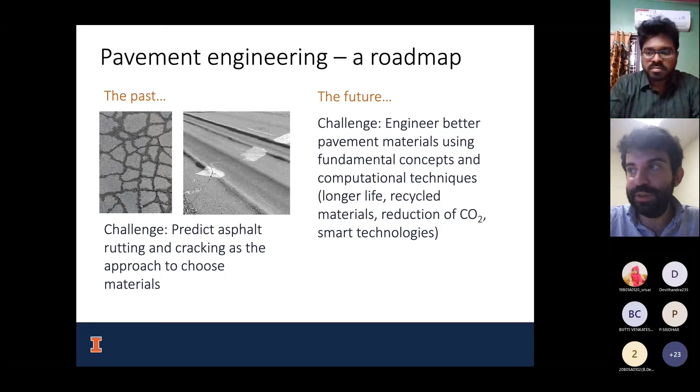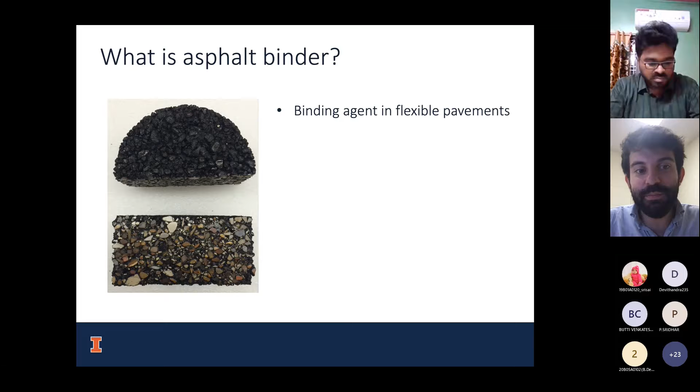So first, I want to start off talking about what asphalt binder is, because asphalt binder is the part we're trying to replace. Asphalt binder is the binding agent, it's the glue that holds aggregates together. We are also trying to replace aggregates, but not quite as much as the binder. It's obtained from fractional distillation of crude oil, so this basically means it's coming from the oil and gas industry, but it can also occur naturally—that's a very small amount. Almost all of it comes from the oil and gas industry, so you can see why we are, of course, trying to replace it quickly.

It's got a complex hydrocarbon structure. This is related to the fact that it's coming from the petroleum industry. It's made up of hydrocarbons, essentially the heavier fractions, higher molecular weight, the leftover stuff that cannot be used as fuel for vehicles and whatnot. It's used as asphalt, but it's not free and it's not a waste material. It's something we get from the petroleum industry, but it's still expensive and takes some difficulty to use. It's a thermoviscoelastic material, which most of you at the undergrad level are probably not too familiar with.

Basically this means it's very sensitive not only to temperature, but also to the loading rate at which the material is applied. So it's very sensitive to the rate at which we load the specimen, meaning the traffic speed in our case, because we're talking about pavements.

All sources, even different batches from the same source, have different properties. You will see the properties look a little different from each source. Sometimes even the same producer will hand you asphalt binder just a few weeks apart, and you'll see big differences. So we try to think of this material as always being very dynamic. We don't know exactly what we're getting at any time, but it's important to characterize it because it's generally thought to control mixture cracking.

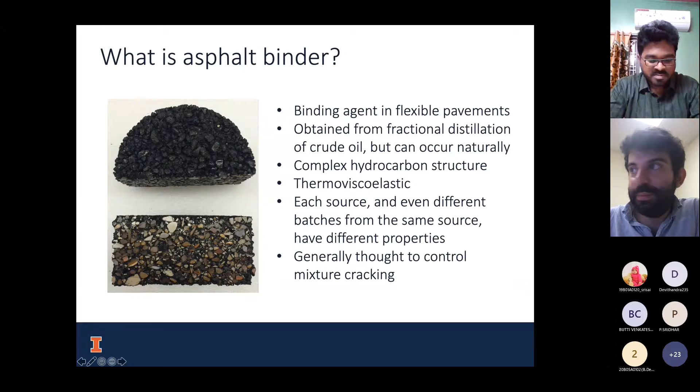For a long time, we studied just the regular binder, the asphalt binder coming from petroleum sources. But as mentioned, there are some new challenges now, and one of the biggest challenges is that we aren't going to have asphalt binder the way we did.

On top of that, there is a lot of push to be more sustainable, to reduce our carbon footprint. So we need to use asphalt in a strategic way, using recycled materials, rejuvenating the materials we have, and then replacing asphalt. I want to focus this presentation a bit on what's relevant for those watching at home, so they can understand what might help improve infrastructure in India, but also infrastructure around the world, to make our use of this material a bit more sustainable.

So first I want to talk about recycled asphalt. Reclaimed or recycled asphalt pavement — in the US, we reclaim 90 million tons of asphalt a year, and 80% of that is recycled, meaning this is the most recycled material in America. A lot of people don't think about this material specifically; they think about recycling metals and plastics at home. But actually, this is the most recycled material on Earth. We save $30 to $80 a ton when we recycle. But more importantly, this practice should be green and sustainable.

Now, recycling today is not as relevant in India because many of the asphalt pavements are newer. India was previously using a lot of concrete for paving roads and now has many more miles paved with asphalt. So a lot of this recycling isn't as relevant yet, because there aren't many pavements reaching the end of their service life right now in India. But it will quickly become relevant as more pavements reach end of life and you need to decide what to do with those materials. If you send them to the landfill, you're wasting the potential of recycled materials and creating waste. So instead, we try to recycle as much asphalt as we can for the pavement.

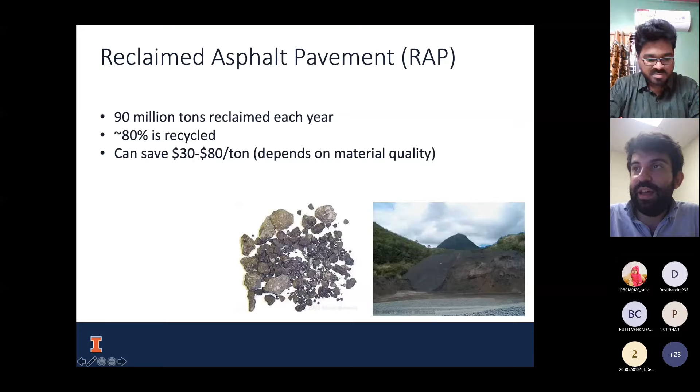And for municipal solid waste in 2017, all of it together was 67 million tons. So again, asphalt is more than all of the municipal, meaning the things from houses and regular businesses. Asphalt is more than all of that we're recycling, right? So we're recycling such a huge amount.

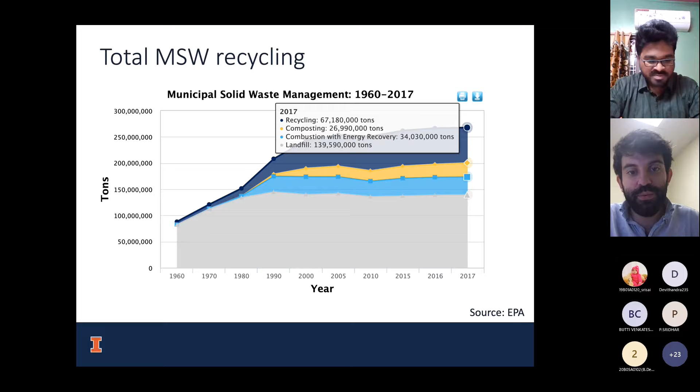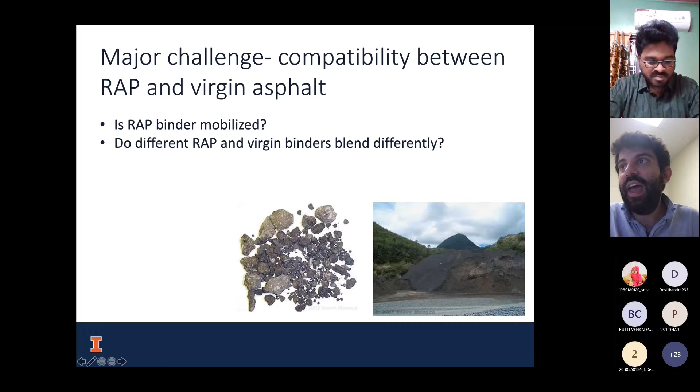This is the challenge, right? We want to use this material as a replacement for the asphalt we're already using. But the major challenge is: is this material compatible with the virgin asphalt? So is the RAP binder in the asphalt mobilized? And do the different RAP and virgin binders blend differently, right?

The RAP binder is heavily oxidized. It's more stiff, and it has difficulty mobilizing because this material is aged, right? So that means it had some reaction with the oxygen, and now it's finding a lot of difficulty getting it

to move again at normal mixing temperatures. And the big challenge here from a sustainability perspective - I think I talked about this last time, but I want to now emphasize the sustainability perspective, right? The big challenge from a sustainability perspective with this mixing is if we have to raise the temperature to mix it, that increases CO2 emissions and it increases hazards to human health, right?

Those are the two things we cannot have. When we use RAP, maybe we reduce the CO2 emissions because we need to produce less binder, but then we're increasing them again when we use it because we're raising the mixing temperature, right? This is a big challenge. This is something we cannot do.

So we don't want to elevate the temperature. We want to keep the temperature reduced. And so maybe not all RAP binders can be used the same way. So we have to consider which ones to use.

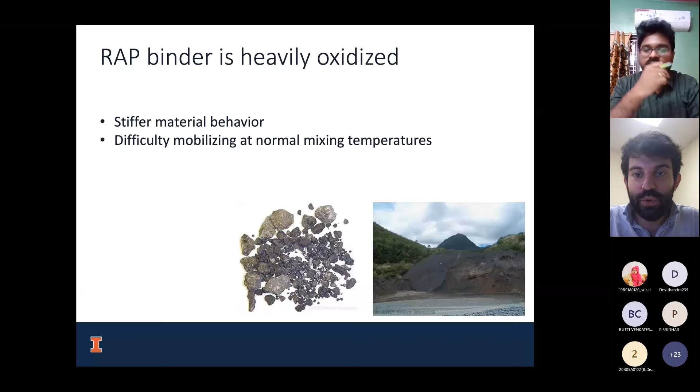And again, I think I showed this last time, but we came up with a simple titration-based procedure. We want to indicate if this material is suitable for recycling. So we have a titration-based procedure where we check the dispersive forces present using titration of a solvent. We just add drop by drop of solvent to a sample of binder, and we measure how much dispersive force is present. So if the binder is too stiff and brittle to be mobilized, we get a good sense of that and we can know to avoid that RAP or to use it in a different application.

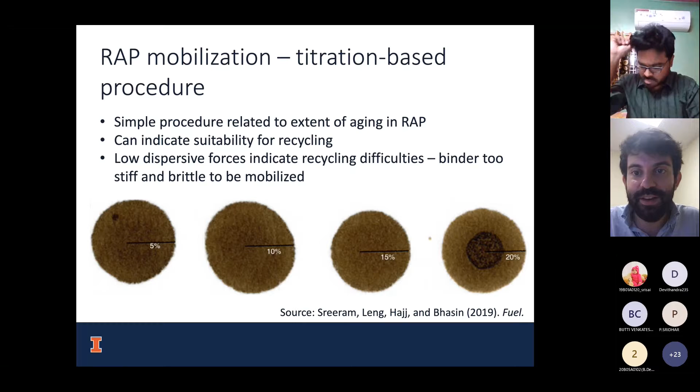You can see just some different binders, some different virgin asphalt binder compared with RAP. So we have some baseline, and then some RAPs are almost exactly the same, so they haven't been aged at all, and some are very different.

So again, I wanted to present this work because I feel this is so crucial as it comes now as a challenge in many countries using RAP for the first time, right? Not to make the same mistakes that we have in the United States where we just said all RAP is treated equally. Instead, we want to make sure we're screening the RAP properly and understanding how we can use this material for the first time.

And I think when you guys go into industry, many of the students here will find there's always a challenge like saving money, right? So the contractor needs to save money. They want to do the most efficient thing. They want to use the most RAP possible because it's free. It's a waste material. But what you will find is that you need to check carefully if this RAP can be used and if it's going to lead to premature distress.

Because a lot of times when the construction is over, the contractor is not responsible anymore. Then it becomes the agency's problem. So if you are working for the highway agency, you want to make sure that you're stressing that you need to check if that RAP is good. And this is something we're still not doing in the United States today. So we're still a little bit concerned about whether all RAP is equal, right?

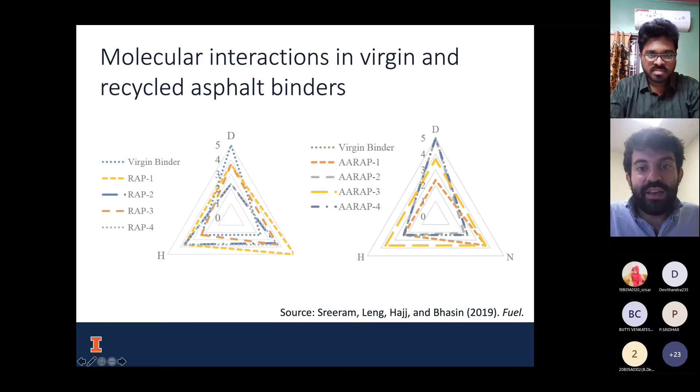Next thing, we want to check the interaction between the base binder and two different RAP samples. This was also done in this study, where we checked the dispersive forces present in mixes of RAP and base binder. That's another way to identify which RAP is more prone to recycling and better blends with specific virgin binders.

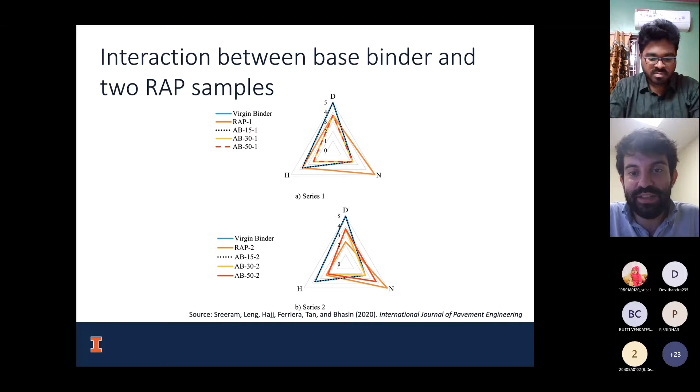So compatibility is important. I suggest definitely keeping compatibility in mind as you explore this material.

Now let's talk about rejuvenation. If you have RAP that's incompatible, you still need to use it, right? This is the most critical thing. Maybe you'll have RAP that you simply don't know how to use, but you cannot landfill it, so maybe we can rejuvenate.

I want to talk very briefly about some of the types of rejuvenators. A lot of the current best ones on the market are proprietary, meaning they have some commercial formulation. Some company has created them and decided this will be the best softening material to bring the stiffness down and reuse in construction at a reasonable temperature, to avoid CO2 emissions and make it more sustainable.

But from the biomaterials perspective, this presents a really nice option. I think this is becoming quite popular in many parts of the world because these proprietary ones are quite expensive, but biomaterials can be obtained cheaply or even for free coming from nature, such as waste from animals, waste from plants, or various oils.

There's also high maltene oils that come from the petroleum industry, a process similar to asphalt. And there's recycled oils, such as waste cooking oil. We published one paper recently on using waste cooking oil. Some people also use waste engine oil, the kind of lubricant present in engines, as a softening material.

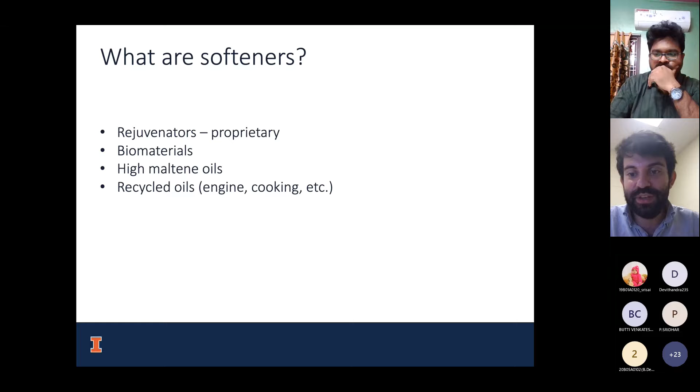Now, one thing you have to be careful of, of course, is that it doesn't compromise performance. So anything we use here, make sure it doesn't compromise performance before you do it.

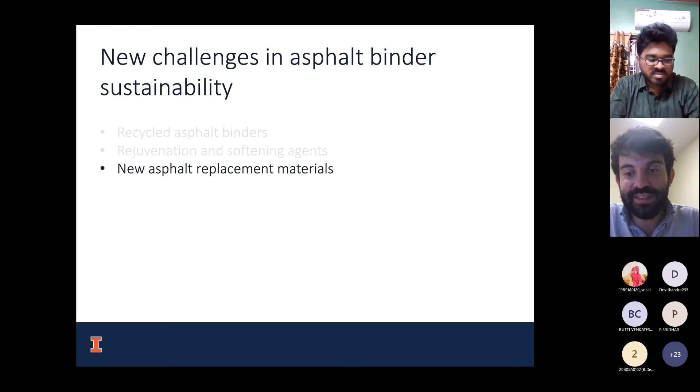Finally, I want to talk about asphalt replacement, which is kind of what I was going for. We talked about using recycled asphalt, which is one critical way, probably the most critical way on the horizon, because we already know this material worked once, so we can recycle it easily. But now we want to know, how can we replace asphalt with other materials?

The first one that I think is most critical - and I'm unique in thinking this is most critical, most people kind of overlooked it - is sulfur, because it's so widely available and we know the performance is good. In this paper, we looked at sulfur as a replacement for the asphalt binder in the mix, and also for the asphalt aggregate.

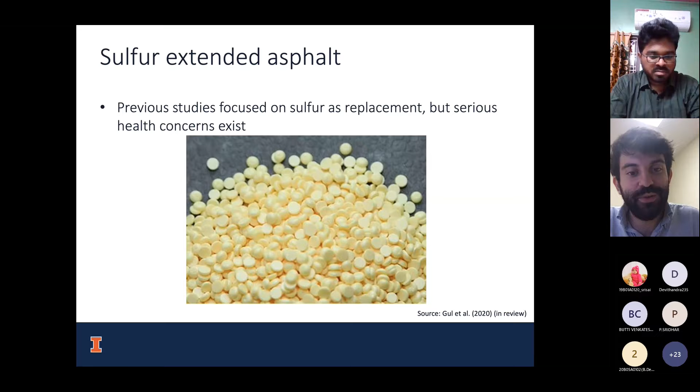You can add it by what they call the wet method or dry method - where you blend the binder with sulfur first, or you just blend the whole mix with sulfur, more like an aggregate. We use these elemental sulfur pellets, but the problem with sulfur is that human health hazards exist from it. This material emits a lot of toxic fumes, and again, we always have to think of health.

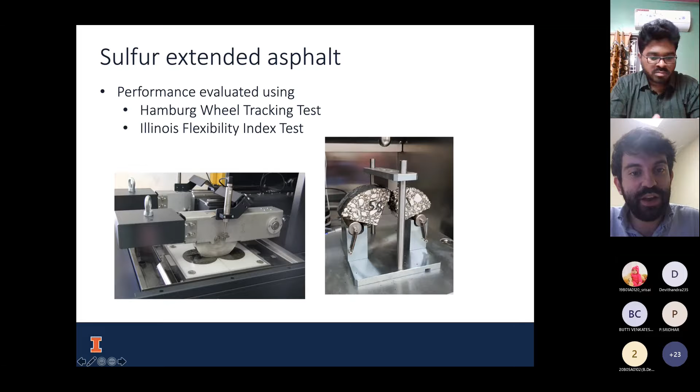We ran some tests, for rutting - the deformation of the pavement, that's the Hamburg wheel tracking test - and cracking tests in the IFIT, Illinois Flexibility Index test. We found that rutting is generally improved when we add sulfur. Cracking is a little more mixed, but at 30% sulfur it didn't compromise it too badly, so we consider that a possibility. What I like about this study is it shows the feasibility that yes, we can replace asphalt with something in big percentages.

Besides recycled asphalt, nothing else right now we're using more than 10%. But with sulfur, we can go up to 30%, for example, and make it work.

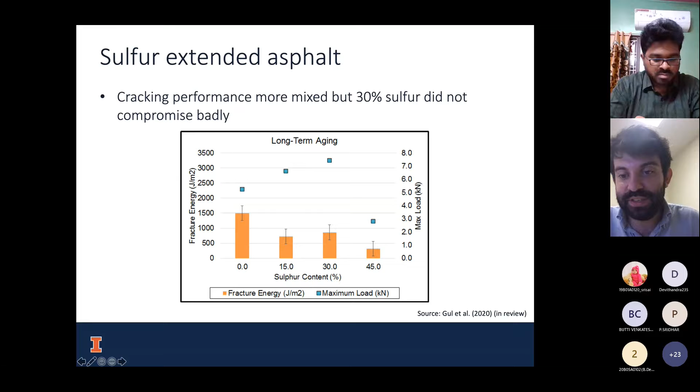This leads me into the closing, which is talking about new technologies, for example plastics in asphalt. India is actually a world leader in this area. Many cities right now, like Chennai and Pune, are already using plastic waste due to a mandate from the government. This plastic waste is being used as a replacement for both asphalt binder and aggregate. But the disadvantage is that the waste needs processing.

It's not ready to go into asphalt as is. For example, you have recycled bottles, like this sanitizer bottle. When it's empty, I'll put it in recycling, and someone will take it to a processing plant to process the recycled material, because it can't just go into asphalt like a bottle. It has to be melted down, undergo some depolymerization or structural change, and be added to asphalt to make a mix.

But those structural changes have disadvantages—they create CO2 emissions themselves, and we have to be very careful that we're not compromising sustainability when we do that. This is critical to keep in mind when using plastics: we cannot spend too much energy recovering them. So there are two methods, as I mentioned.

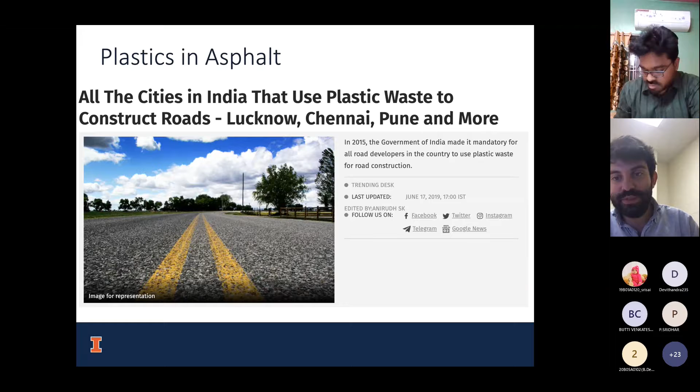Another option is ground tire rubber. I think this will be critical for India, because as many vehicle tires wear out and more people are driving, the highways are really increasing in traffic. There will be a lot of leftover tires available, and when we grind that tire rubber, it can be used through wet and dry methods as well.

We know this works, right? Rubber is a good material because it's heavily elastic. So when there's strain or stress applied to the pavement, that deformation can easily be recovered because rubber is a very elastic material. It's not like the binder, which is viscoelastic—a bit between solid and fluid. Rubber is a very stiff, elastic material, so we know it works well.

But one major challenge is that we have to process it first, which takes time and energy. Second, and most importantly, it needs to be stable—it needs to disperse well, and rubber and many plastics do not have fundamental compatibility. This is where I'm hoping the next generation of researchers, all of you, will pick up this issue of how to make these more compatible and use them in high amounts.

Maybe one day we'll be driving on roads entirely made of plastic or rubber rather than asphalt, which will be in part a sad day because it's such a long legacy, but also, I think, very critical. With that, I wanted to wrap up—I think I've gone about 20 minutes—so I'll stop here and leave time for questions. Thank you so much for your attention, and thanks to all sponsors of this work.